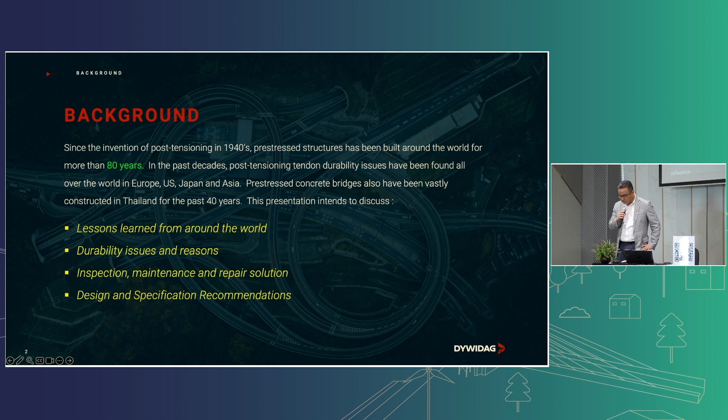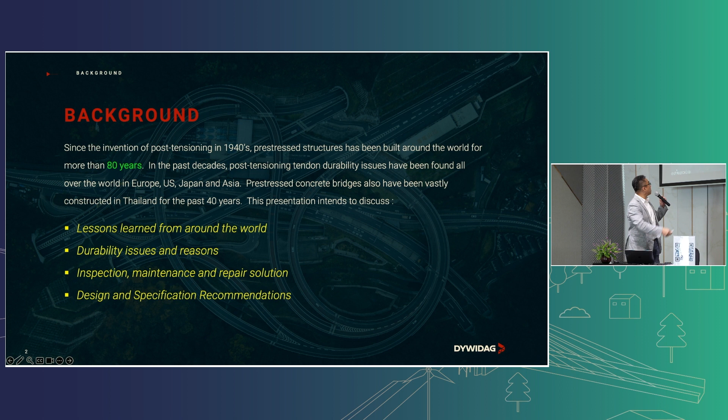Since the invention of post-tensioning in the 1940s, pre-stressing structures have been built all over the world for about 80 years, and that's a lot of structures. But only in the last couple of decades have issues of post-tensioning durability surfaced around the world, in Europe, in the US, in Japan, and so on. In Thailand, pre-stressed concrete bridges have been built over the last 40 years or so. I want to discuss lessons learned from around the world on this issue: what are these issues, what are the reasons, what are the inspection methods, maintenance, and repair solutions that are possible, and finally a little recommendations on design and specification.

When we talk about these issues, I draw a comparison to health inspection. Many of you are probably 40, 50 years old - I'm 52 myself. For many years the doctor has told me, hey, you're at the age you should get a health checkup. But I think a lot of owners have the same mentality as me: first, I don't want to know about it, maybe. Second, I'm healthy, it will not happen to me, right? But as soon as you hear that friends and family around you - the guy running marathons has high cholesterol, a friend of mine, this is real, playing basketball and had a heart attack, your aunt and uncle start to have cancer, problems this and that - you start to tell yourself, hey, maybe I should have a look at myself. So I think this is a common mentality facing a lot of owners, and I started making my health checkups now.

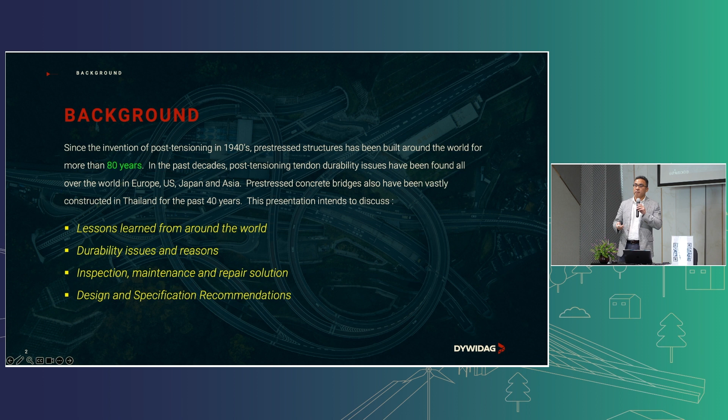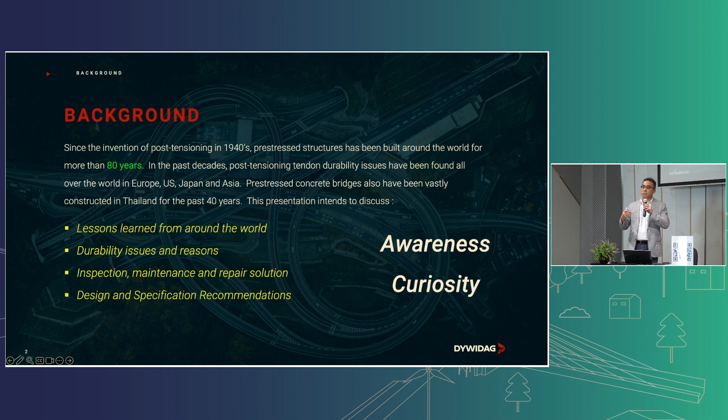So looking at lessons from friends and family around the world, I hope that's the key takeaway for today. It's not for you to rush and start an inspection project, but I want you to be aware of this, and I want you to have the curiosity to look at this issue where it has happened around the world.

A little about myself, besides being 52 years old: I started working for DYWIDAG after I graduated, so I've been around for 27 years. Most of my life I've been associated with pre-stressing structures. I've also built around 20 stay cables and different types of pre-stressing structures. I'm currently the Asian Regional Manager for DYWIDAG, in charge of around 12 countries in the region. It's an honor for me to be here and share this topic with you.

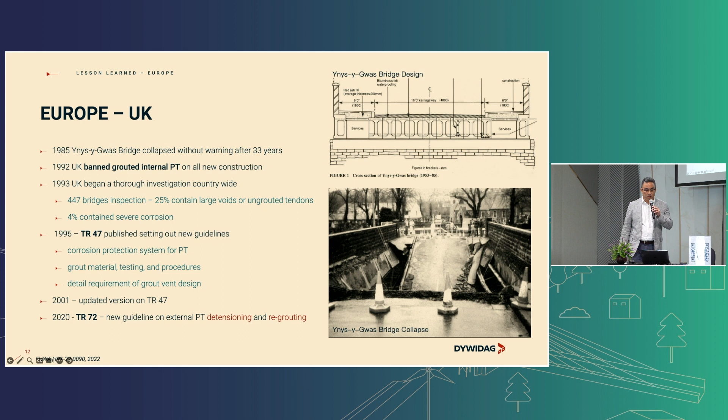In rest of Europe, in Germany, it was found that about 50% of bridges built before 1970 show corrosion damage. With a conservative approach, Germany also banned grouted tendons very quickly, and by 1999 they specified that external tendons have to be replaceable and restressable.

Once you find damaged tendons, if you cannot replace them, there's not much you can do. So from the design perspective, replaceable and restressable became a very important criteria. Nowadays, Germany only uses non-grouted, prefabricated wax-filled external post-tensioning for all bridges.

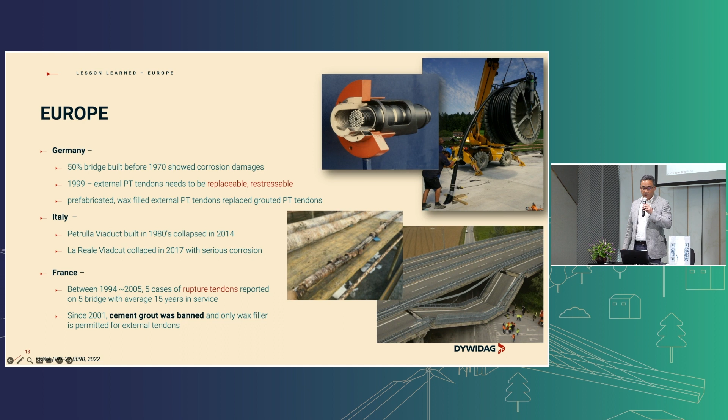France had its own case. Between 1994 and 2005, they found 5 cases of ruptured tendons in 5 bridges, which had only been in service around 15 years. Again, France banned cement grouted tendons since 2001, and only wax fillers are permitted.

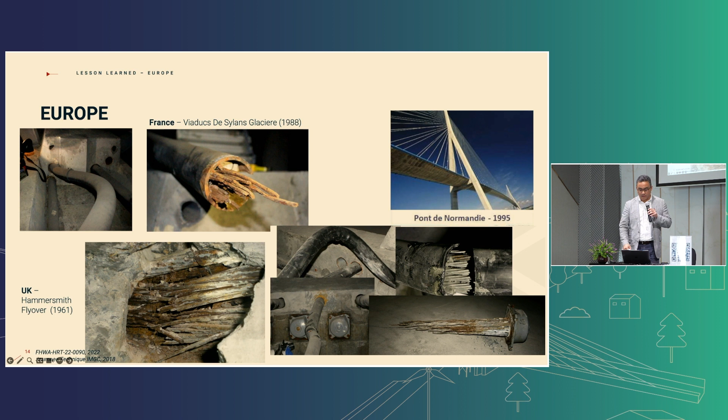This is what ruptured tendons look like. The tendon gets corroded to a certain stage and just snaps open, deformed - this is what happens when you open it up and see these issues. Only owners or inspectors probably will not see this, and it's always a case where you stumble upon it.

So what did Europe do after that? Besides UK, the FIB, the Pre-Stressed Concrete Associations of Europe, took this issue very seriously. A symposium was called in 2001, inviting different countries including UK, France, US, Japan, and so on, to discuss and share lessons learned and problems identified, and they published FIB Bulletin 15 on durability of post-tensioning tendons.

In parallel to UK's TR47, Bulletin 20 was published in 2002, also highlighting the importance of grouting of tendons in pre-stressing structures. A more comprehensive publication was issued in 2005, FIB 33, on durability of post-tensioning systems, again emphasizing design concepts of durability, material and construction related to pre-stressing systems, protective covering, grouting, and the importance of maintenance, assessment, and rehabilitation.

These specification guidelines just continue to improve - it doesn't stop there. Every country, through international committees, continues to look into this issue. Subsequent publications were made in 2014 on polymer duct or plastic duct for post-tensioning.

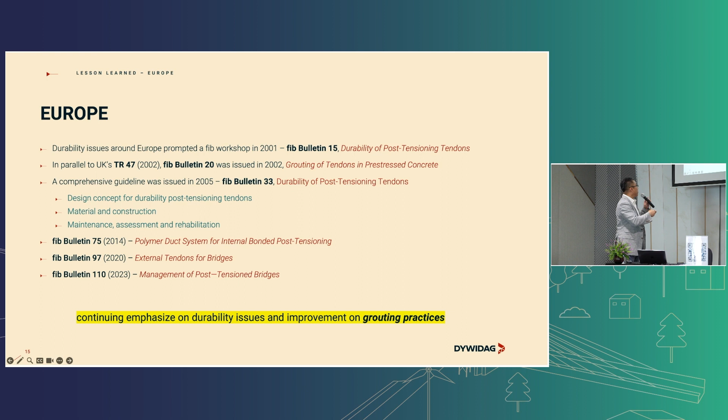There's a comprehensive state-of-the-art technology release in 2020 on external tendons. Then further in 2023, FIB published a very well documented guideline on management of post-tensioning systems, or post-tensioning bridges. Over in the US, a similar thing happened around 1999.

I think this is probably a time where bridge inspection was taken more seriously. So many things happened on different bridges. Niles Bridge, built in 1983, had one ruptured tendon found in 1999. Mid-Bay Bridge was a quite famous case with a lot of publications - one ruptured tendon found in 2000, leading to replacement of 11 external tendons. A more serious problem was found in Sunshine Skyway on vertical tendons of pre-stressing.

So the Florida DOT started comprehensive statewide investigations, which led to a publication in 2002 called New Directions for Florida Post-Tensioned Bridges. It consists of 10 volumes, and there were major changes in terms of concept, practice, design of post-tensioning, detailing, design strategy, grouting material, procedural requirements, and so on - specific requirements such as shop drawings showing correct duct connections, grout ports, vent detailing, and the use of permanent grout caps.

More highlights on grouting material: very strict testing requirements on bleeding, sedimentation, fluidity tests before and during grouting, and also a requirement to do a full-size grout mock-up. You want to do a trial simulating the actual condition of the bridge before you do it - you have to prove to the owner and the supervising consultant that under actual conditions you're able to perform the grouting work properly.

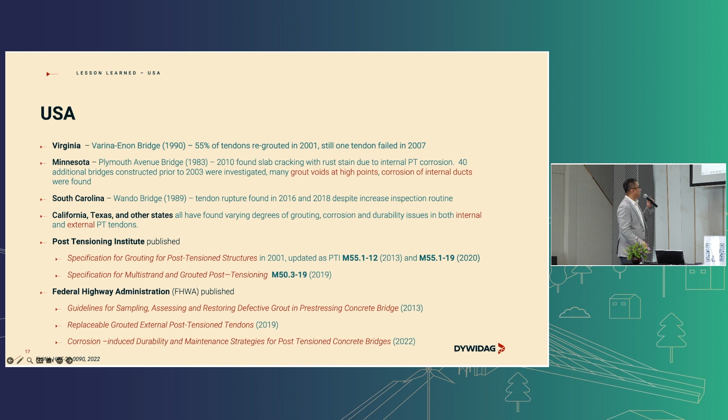The US National Guideline Post-Tensioning Institute published a series of new specifications related to grouting of post-tensioning structures, updated again in 2013 and 2020. Federal Highway also started many investigation reports and research studies, then published a guideline for sampling, assessment, and restoration of defective grouting bridges, and a well documented publication on replaceable grouted external post-tensioning, and further in 2022 another comprehensive publication on durability and maintenance strategies.

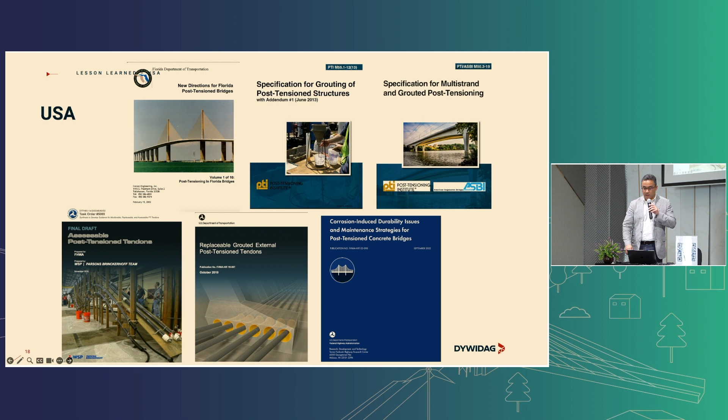So these are all well-published documents, and I think it's good for Asian countries to start looking at this issue more seriously - there's a lot of reference that we can look at and learn from.

Now, closer to Asia, Japan was one of the earliest countries in Asia to identify this problem. An investigation in the late 1990s of about 120 bridges found significant issues - a survey found only about 70 to 80% of bridges had proper grouting. Classification was done on these problem bridges, and you can see corrosion of the cable, failure cable, contributing to insufficient grout or chloride attack was well documented.

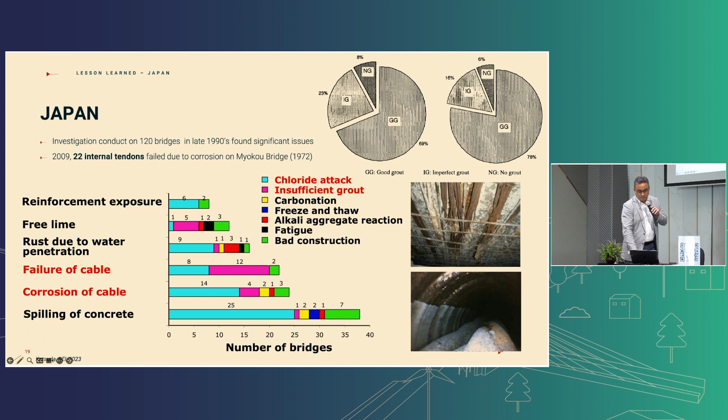Japan, being quite advanced in terms of thinking and improving, took responsibility to look at new construction manuals. The Pre-Stressed Concrete Contractor Association revised their manual 6 times just to improve the guidelines and practices. Also the design and construction guideline published by the Pre-Stressed Concrete Institute was published in 2005 and again in 2012.

The publication mainly focused on non-bleeding flowability of the grout, and also emphasized grout location, permanent caps, replaceability, and inspectability of these external tendons.

They first tried to use transparent duct. It seems like a really good idea because once you have the transparent duct, you see the problems. So they started to use this, and what they found was you get to see the problem and realize you cannot grout these properly. So Japan very quickly did away with this.

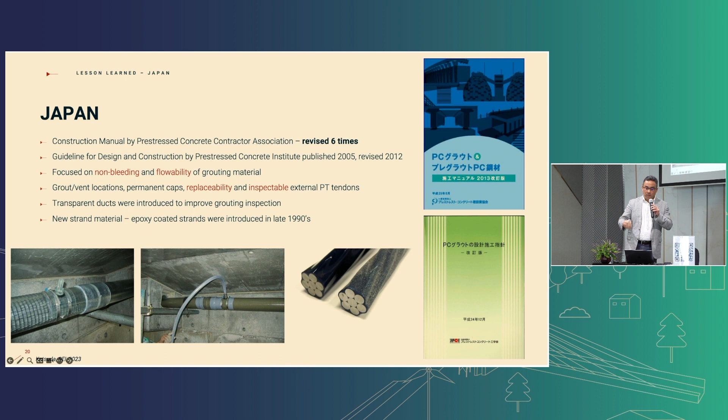So by late 1990, a new material was introduced: epoxy-coated strands. A lot of you have walked into the seminar before - we see some samples in front of you. Instead of rewriting specifications, demanding a very strict testing protocol, or demanding supervisors to really force the contractor or specialist subcontractor to perform the grouting properly, Japan simply got rid of it.

So by 2004, grouting was only permitted on straight tendons for internal tendons, and only epoxy-coated was permitted for external tendons. So you can see by the beginning of 2000, there were substantial structures in Japan using only epoxy-coated strands, and these epoxy-coated strands are not within the HDPE, they're fully exposed.

And these strands have excellent durability performance - you can see after 1,000 hours of salt fog test, it has 0 corrosion. It's been used for a lot of bridges, it's the standard in Japan. I will talk a little bit more about epoxy-coated strands at the end of this presentation.

Let me finish looking at different countries. So Hong Kong - before, it was not an issue. There have been a lot of bridges constructed until 2019.

During a routine inspection, they found a tendon rupture on the Shenzhen Bay Bridge. The bridge only opened to traffic in 2007. There was suspicion of poor grouting practice, and this is what happened when they took it out.

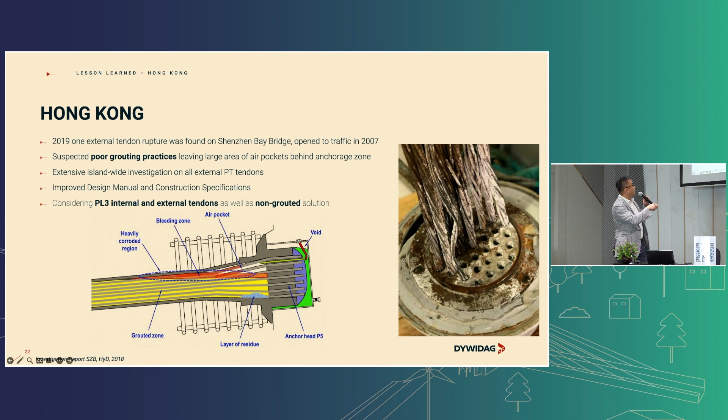There was a large area of air pockets left behind the anchorage zones, and Hong Kong started an island-wide investigation on external tendons. They started to improve grouting practices and design specifications, same as other countries, and now they're considering PL3 internal/external tendons, which I'll address later, as well as a non-grouted solution.

In Korea, same problem was found: ruptured tendons, severe corrosion, and there has been ongoing replacement since 2016.

Not every country is open to sharing their bad experiences. Normally Europe and the US are very open, so you've seen a lot of publications. But because it's not published doesn't mean the problem isn't there. I think a lot of Asian countries, including Taiwan, where I was born and am working, have the same problem—the owner chose not to see this. So maybe it's time for Thailand to start thinking about this.

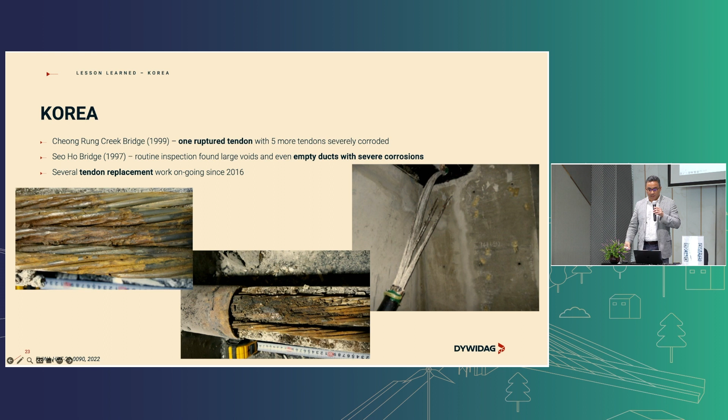So what is the problem with these voids and durability? First, cement grout is the most important protective system in the pre-stressing tendon. With the correct water-cement ratio and appropriate additives, we create an alkaline environment which passivates the steel surface and prevents corrosion from developing.

But what happens, as seen in many incidents in different countries, is very often incomplete filling of tendons. In the ducts, when you don't fill the tendons properly, you leave behind large void areas, exposing them to oxygen and moisture, leading to corrosion of tendons and in some cases severe failure.

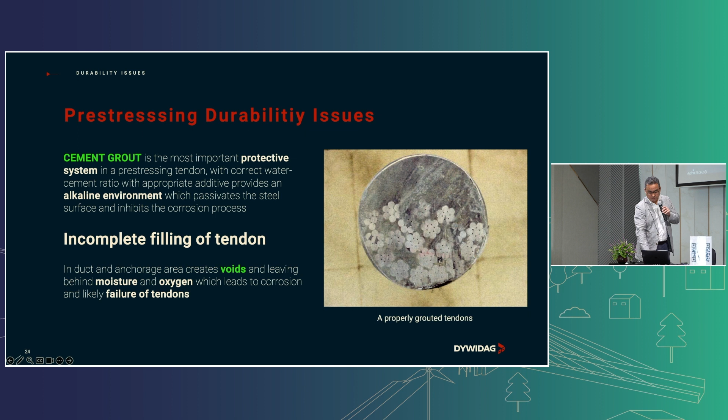Before looking more at durability, let's look at what's in the cement grout mixture. It's actually quite simple: just cement, water, and admixture.

But if you look at the correct specifications, first the cement should be only Portland Type 1. Very importantly, you need to check the content to ensure minimum or even zero chloride and sulfate, which Professor Chokchai already stated is a very important element affecting durability of the concrete.

With a Blaine value of 300 square meters per kg—Blaine value relates to surface area—you need fine grains of cement so that when you mix the grout it creates minimum lumps and better flowability.

The water used should be drinking water—the same nice water we use for beer and coffee should also be used for cement grout. No organic materials are allowed, and you should have a minimum content of poor materials that could affect the mixture.

We use different kinds of commercial admixtures available to buy, normally for improved water reduction, flowability, setting time, bleed control, and volume control—but very importantly, no expansion agent is allowed. Besides mixing, there should be requirements for laboratory and field testing with mock-up trials to reflect actual bridge conditions.

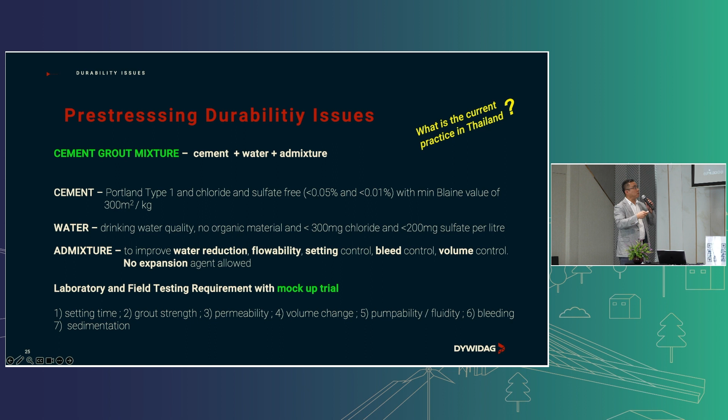But the question is, what is the current practice in Thailand? I don't know—maybe you can tell me. I come to Thailand a lot, but I cannot read Thai specifications. We all know it's cement plus water plus admixture, but are these specific requirements being followed in Thailand?

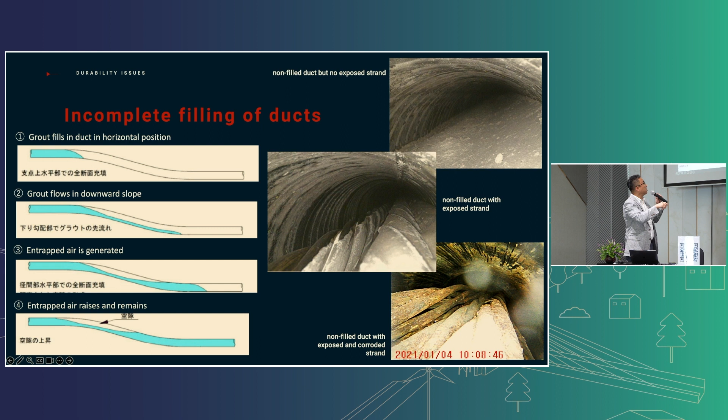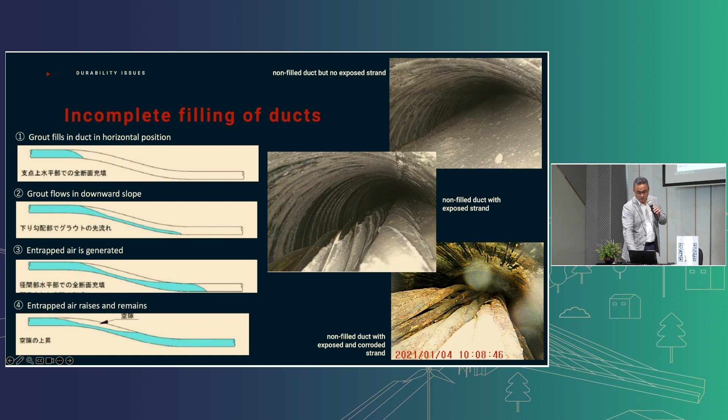If you look with a borescope, if lucky, you might find grout fill covering the strand without it being exposed. If you're not lucky, the strand is exposed without grout covering it. And if you're really unlucky, you'll find strands in very corroded condition. This is related to how you do grouting.

It's not just about mixing and pumping. As I said in the previous specification, a lot of emphasis is placed on design and placing of grout inlets, grout outlets, and the sequence of how you grout.

Once the grout is pumped and comes out of the mid inlet outlet, you should observe the outlets to make sure there is sufficient quality of grout coming out. Then you shut it off and continue to pump until the next high point, observe sufficient grout quality coming out, and shut it off.

You're supposed to keep the pressure for a while to make sure the grout continues to pump until it's really full, then stop for a while. And this is something I'm sure nobody does: you're supposed to go back and open all these vents to check again after setting, for reasons I'll discuss later—bleeding, segregation, leaving voids. So you're supposed to recheck this, and if necessary, refill it.

The takeaway today is you have to be aware that these issues could cause corrosion and impact the design life of the bridge. So the grouting procedure itself is already very important.

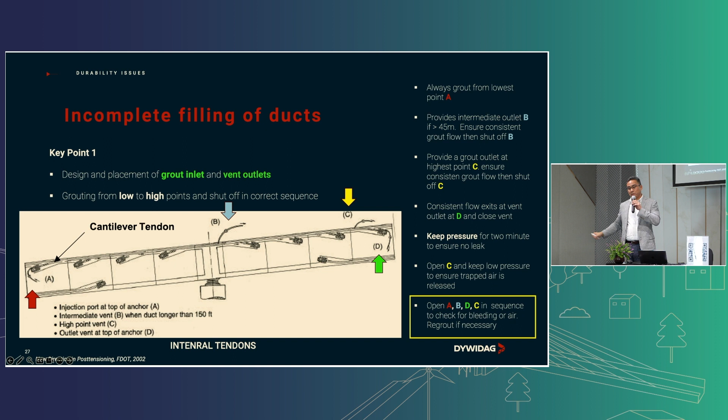Unfortunately, a lot of the time we're under pressure from the general contractor or the owner: finish this in 5 days, finish in 6 days, and we just run and run. We understand every owner in the world is like this, but in reality, this is also the cause of all these problems we've found globally. So the grouting procedure is very important.

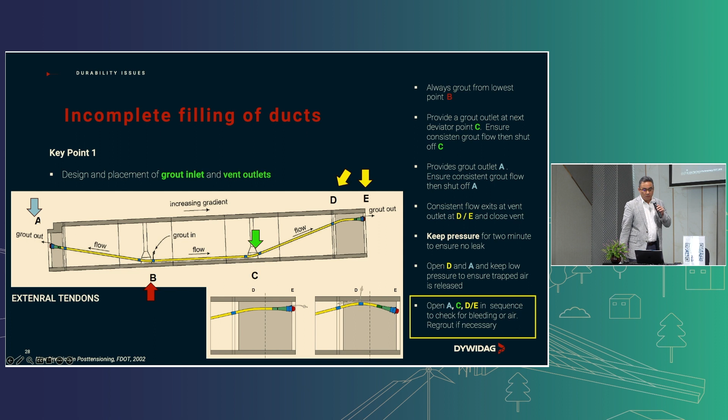For an external tendon, it's the same. You should grout from the low point going up, checking different points at different heights to make sure the grout is coming out properly. Then you seal the system, keep the pressure for a while, recheck, and regrout if necessary. This is just an illustration of how things should be done properly.

Now, what happens if it's not done properly? I had a fortunate, or unfortunate, case. In 2019 in Taiwan, we had the collapse of an arch bridge.

It's called the Nanfang Ao Bridge. I'm not sure whether there was news of it in Thailand, but it was a failure of a stay cable. The whole arch bridge came down and 6 people were killed.

Obviously that started a whole awareness for the owner. From our perspective, this is the last cause we want to see—for the owner to start being aware of this due to loss of life.

But the focus was not on the main bridge. Actually, during the demolition of the approach bridge, I went to see how they were taking down the segments, because it gave a very rare chance to see a post-tensioning system after 23 years.

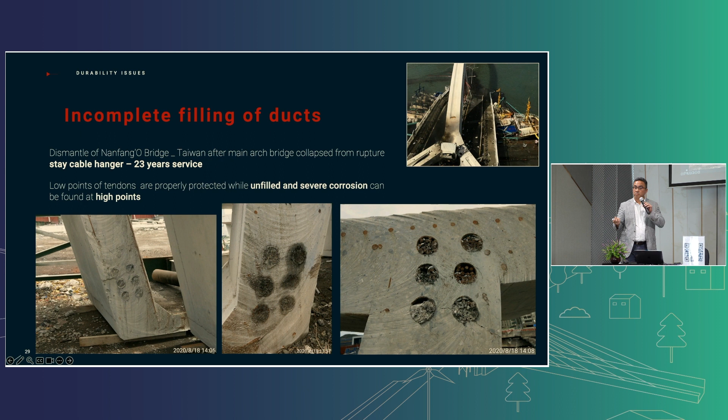You can see the lower part of the tendons are actually in quite good condition. But when you look at the high end of the web, you see voids and corrosion. If you look closely, they're so corroded that you can just pull them out, and some of the strands are dust—not even strands anymore.

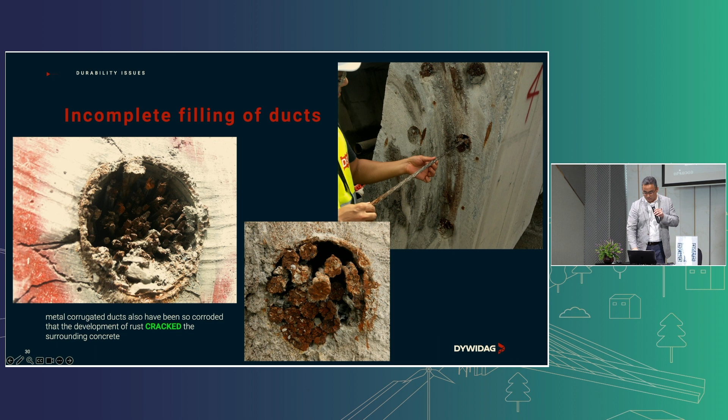What's really interesting is looking at the corrosion—not only the strands, but the metal duct around them. It's so corroded that it's causing cracks in the concrete. So cracks in concrete don't only come from external impact, they can also be caused internally. This gives some understanding of what happens when you don't grout properly.

So why do these things happen? I want to explain the concept of segregation and bleeding. According to fib 20, the bleeding requirement of water and air after 3 hours at rest has to be less than 0.3%.

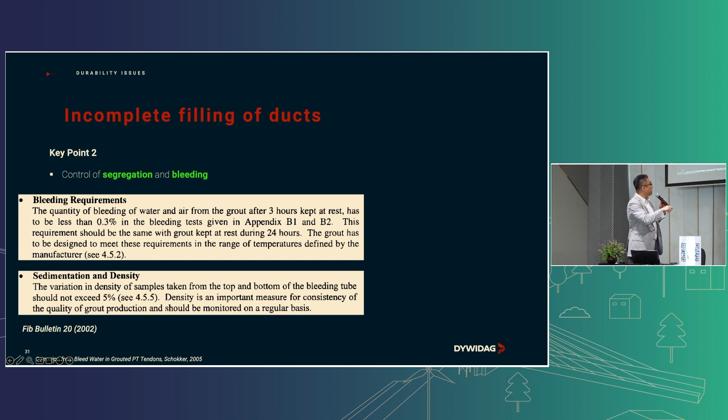When it comes to sedimentation, after bleeding occurs, the density difference between the top portion and bottom portion of the grout should not exceed 5%. But in reality, this is very difficult to achieve.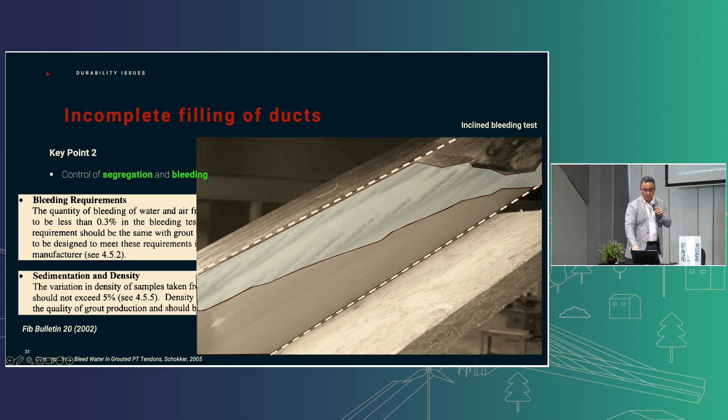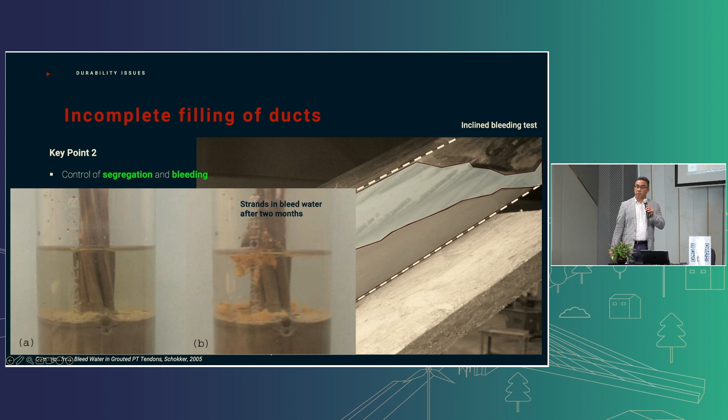From research, you can see that once this happens, the strand actually starts to corrode in 2 months. So in a lot of cases, the owner has taken over a bridge where the pre-stressing tendons have already corroded for several, maybe 1 or 2 years. So it is a serious issue.

So what does it mean, how does this come from? If the grout mix design is incorrect, once you start grouting in the duct, the fresh grout with light and heavy matters start to separate. Slowly you get water surfacing on top, and then you have a sort of medium transition of chalky grout.

Too high a water content, not a very solid grout, and in the end you'll have a void on top. First you have water, which then translates to immediate corrosion of the strands. Then you have a void with some poor grout, and this is what happens. So this highlights the concept of segregation and bleeding.

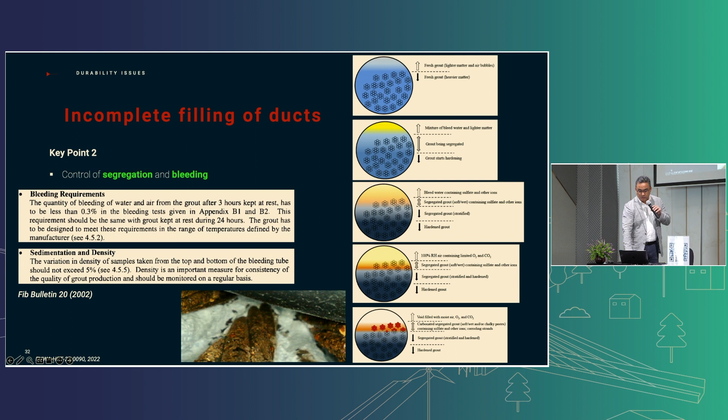And what does this 0.3% mean? Is it enough? It's actually a very difficult target to achieve. But I'll give you an illustration.

This is a very typical tendon, 2 spans, precast segmental, each span 37.5 meters, so total this continuous tendon is 75 meters. 19 strands, we use inner diameter 100 millimeter duct. So this is the theoretical duct volume minus the strand volume, and you get how much grout we should use to fill it.

But then you take the allowable 0.3% of that, you come out with about 1.16 liters of water allowable by the specifications. And how much is that water?

If you look at a typical anchorage system, if the bleeding is dispersed along the duct, then we have a small area, that's fine. But it gets concentrated once you grout in one direction, and in the end the bleeding all comes into a location in the anchorage zone, then this is the volume you'll see.

Very often you will see the same case as before, it gets exposed like this. And if you take that 1 liter, look at 1 meter long of a 100 millimeter duct, this is approximately the area, so it's quite difficult to fill this.

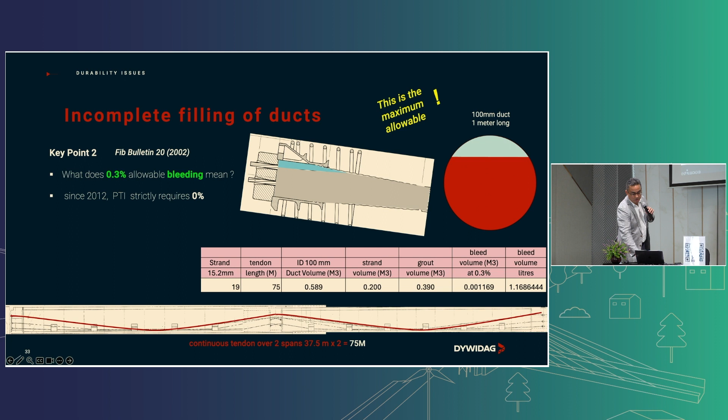So what does 0 mean? 0 means like this. In the wick-induced bleeding test, this is what you need to have. You're not allowed to have any volume changes. However much grout you pump in, it should stay like this. It should have no water coming out.

So in summary, incomplete filling of the duct can be caused by air traps and improper grout mix. A lack of quality control can lead to excessive segregation and bleeding. Water and voids lead to a breach of the protective system, creating a corrosive environment for highly sensitive pre-stressing strands. Durability issues are often undetected during the structure's service life until something bad happens.

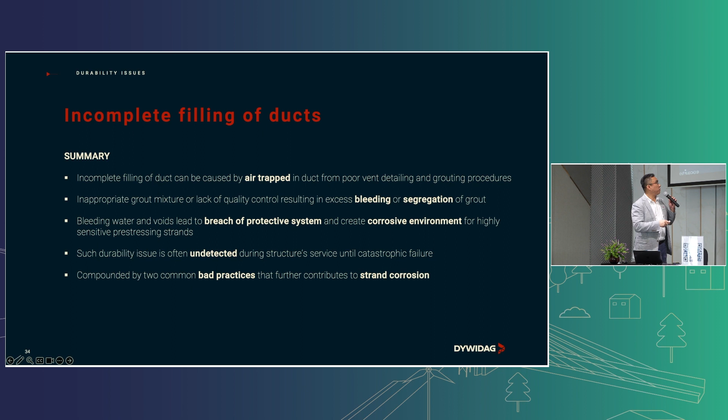Additionally, I want to share 2 practices which I have observed in Thailand, which further compound the problem of strand corrosion.

The first is flushing water. As I understand, this is quite common in Asia. Before you grout, you want to clean the duct by flushing water, to wash away the rust band on the strands or any dirt inside the duct. This practice has been stopped by FIB since 2002. You're supposed to clean the strand before you insert it, not clean it after you insert it.

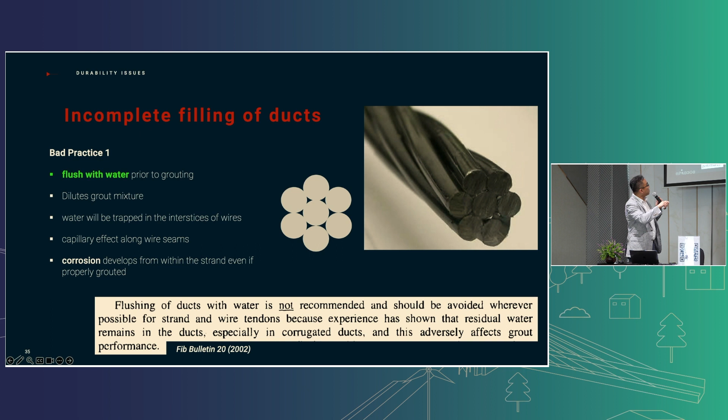So what happens when you flush the water? You blow it out at the end, but how many of us are really confident that we actually blow all the water out? In fact you have water remaining, which dilutes the grout mixture, and it's already very difficult to meet the 0.3% bleeding requirement, but you're adding more water into it. So that compounds the problem even more. Additionally, water will be trapped inside the interstices of the wires due to a capillary effect.

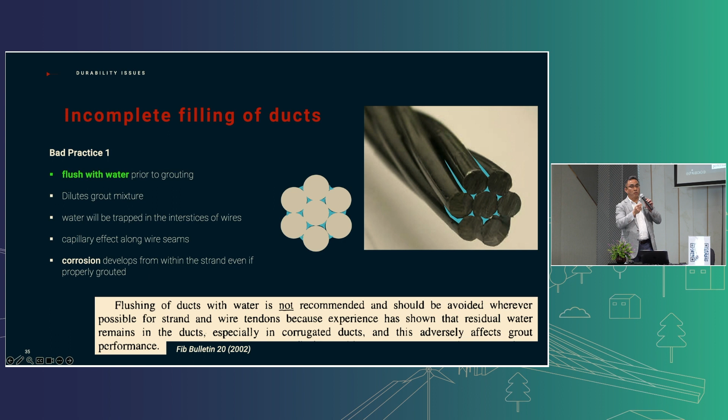So what happens is, once you flush the duct and blow it away, this is what happens: you have water remaining. Then you grout it, and the strands start to corrode from inside. This is a very important concept to remember.

So flushing with water is highly not recommended. Second, not using temporary grout or permanent grout caps. When you do grouting, you're supposed to let it flow into the anchorage area, and using a grout cap, let the grout flow through the wedges, filling up the caps. Whether it's permanent or temporary for internal PT, this is what you should do.

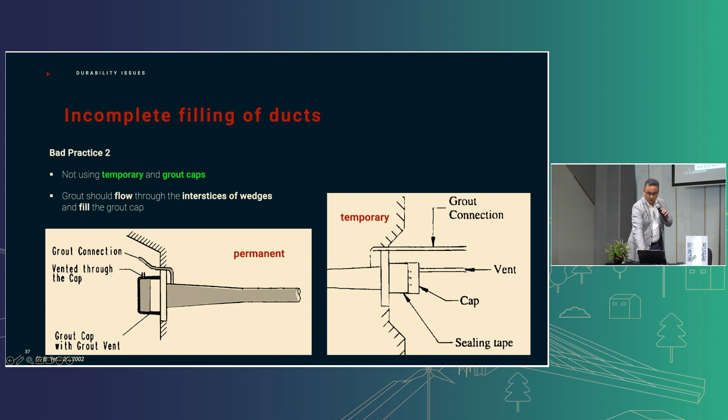But what do you normally do? You just hand mix a batch of concrete and slap it over, seal it up. This is a very common mistake, hand patching with cement mortar. This actually prevents the grout from flowing through the interstices of the wedges and keeps water moisture in the anchorage.

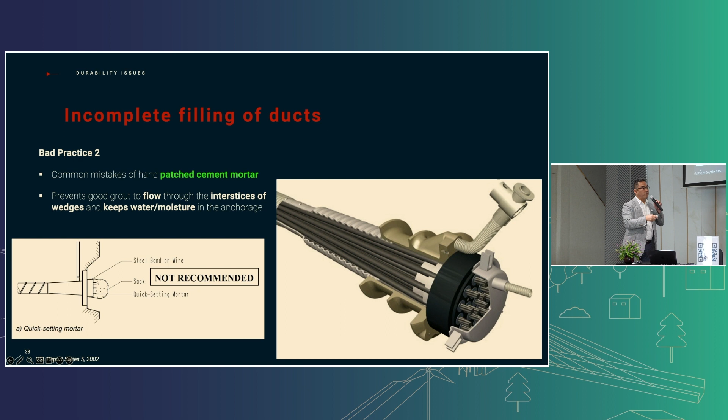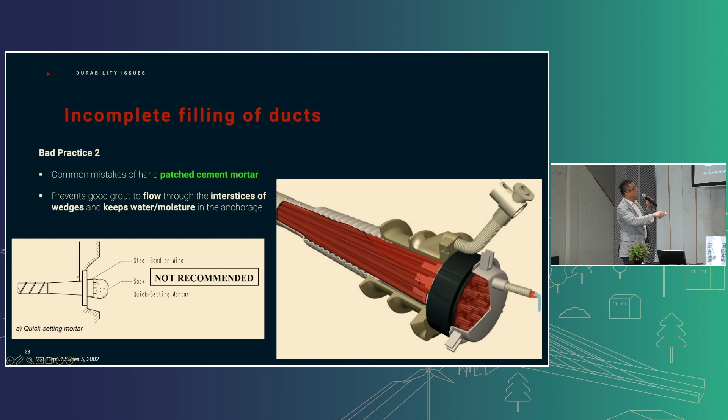Here's an illustration as you grout through. If you have a proper grout cap, you're supposed to push this water through these wedges. Then the grout fills the cap and you push it out. Now, if you stop it there, the grout just comes over and the water stays here. This is what you find when you open the cap or the mortar. These small practices make the corrosion issue even worse.

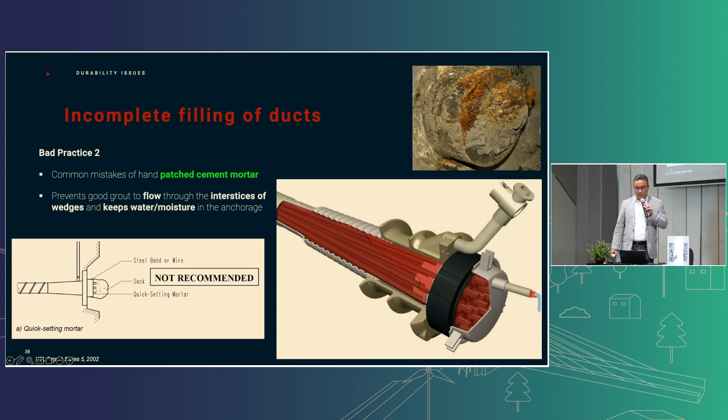So what does this do on a structure? In reality, catastrophic failure is rare. You don't really hear it, maybe people don't report it. We've seen it on documents, but it's a rare case because it's quite difficult to collapse a pre-stressed concrete bridge. First, probably about one-third of the strands need to be ruptured or have wire breaks before the tendon itself fails. So let's say you need to lose about 6 strands within 19.

Additionally, typically your span-by-span precast segment will have 6 or 8 tendons. You'll need about 25%, or 2 tendons, to fail before the bridge starts to be in danger. But it could happen if you don't deal with it in 30, 40 years. The loss of PT serviceability will lead to structural cracks and deformations, which you may find on a bridge inspection, but you probably don't associate it with PT. You probably think it's a concrete problem, or as the morning professor said, contamination, but it could be coming from the PT.

So it's something that you don't really realize. Basically, it accelerates the deterioration and reduces the life of the bridge. So it is an issue.

So what should the owners or a consultant do, facing this potential durability problem? First, ask yourself: are you doing proper bridge inspection or maintenance? If so, is the relevant post-tension inspection included in your program? Maybe you don't know this should be done, or don't know what to do. This is why you should look into the literature I referred to, whether it's FIB or FDOT, and start to build inspection items into your normal maintenance program.

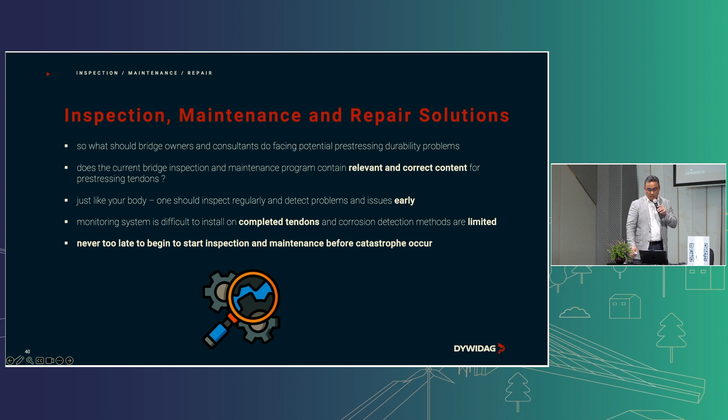Just like your body, as I said earlier, you should do regular inspections, or a health checkup, to identify the issue earlier. Sooner or later you have to face it. A few years ago I was hesitant to do so, but once you start to learn more about the problems around you, you start to realize you should do it. It's never too late to start inspection or maintenance before catastrophic things happen.

So what can you do? Let's look at inspection. Unfortunately, internal tendons are very difficult to inspect. It's embedded in concrete, you cannot really see it. So there's really no proven economical inspection method.

There is some technology in the process. But before talking about inspection, I want to emphasize that's why correct grouting, mixture, and placement is important, because it's very difficult to inspect. Better to do it right from the beginning.

So there are some ground penetration radar with enhanced imaging that allows you to identify the tendons or even void conditions. There's also a different technology related to impact echo, also with enhanced imaging, that can do this.

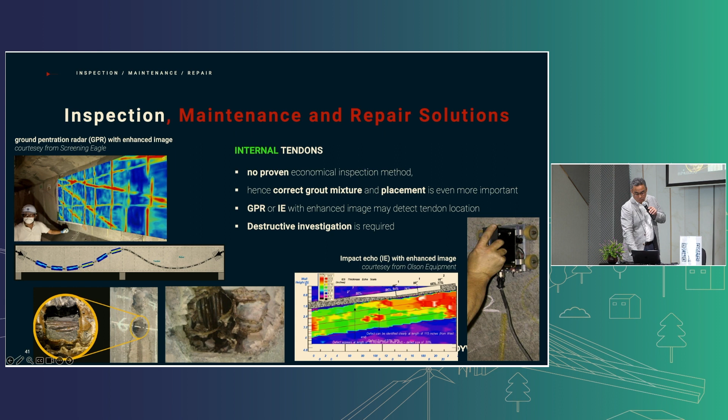But once you identify this, you have no other choice but to break it up, right? So destructive investigation for internal tendons is always required. For external tendons, it's a little easier because you can do some routine inspection by tapping,

or you can just kick it like this. I won't play the sound, but you can hear a very distinct difference in terms of grout filling or empty duct. Once you identify it, you drill a little hole and put a borescope inside. But in general, a tapping method and visual inspection is enough for you to identify something very early.

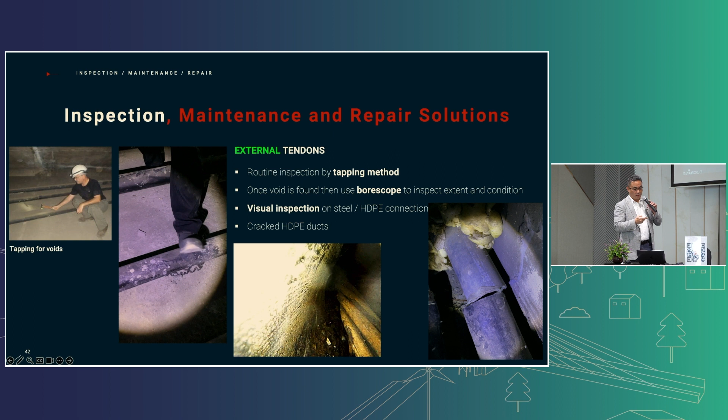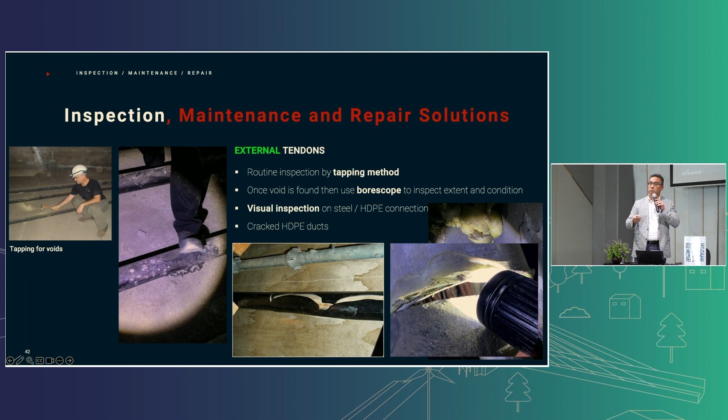So besides hollowness or sound, you want to look at the connections of the HDPE and the steel duct. You want to look at the HDPE itself, whether there's cracks. These are very simple things to do, and the owner just has to make sure that the normal maintenance contractor or inspector is doing it and recording it properly.

There's additional technology we are developing at the moment. For example, robotic magnetic induction, which we've used extensively for stay cables, which Jacob will share a little later. You can also use it to check for severe corrosion or wire breaks existing in the tendons, or there's another technology called capacitance tomography to map the voids inside. So these all just help you identify problems.

There's also some technology, mostly in the research stage, called guided wave ultrasonic, which allows some penetration through a grouted section, but normally it's in the range of 30 to 50 centimeters. But it gives you a quick look at what's behind the anchorage itself. So there are methods that you can use.

So what happens after you do the inspection and find problems? As I said, unfortunately for internal tendons there's not much you can do. You have to do destructive testing, drill the holes, expose the defect, and look at whether there are voids or even corroded strands.

You should clean it properly, and then do vacuum grouting assisted regrouting. These are some of the pictures we've done in the US on several projects. The idea of regrouting is just to reinstate the alkaline environment to make sure further deterioration doesn't happen.

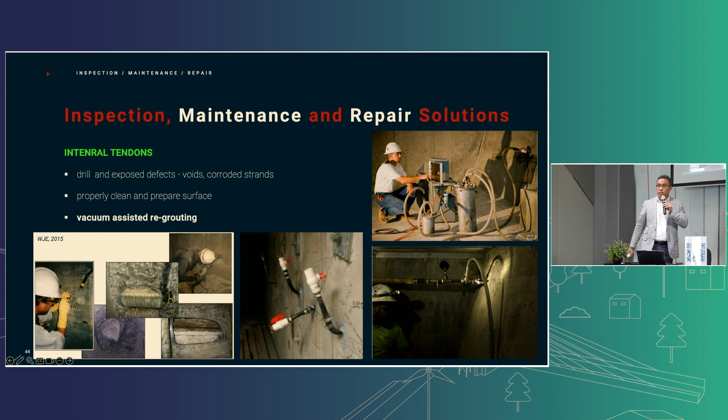So another thing is on the pour backs or the cement patches. What the US is doing now is removing these, because I've already shown you what could happen if you don't do it properly.

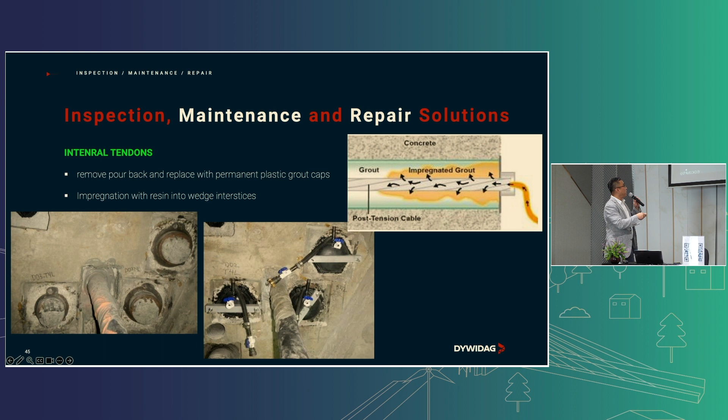You remove it. Some clients or owners use a special resin they call impregnation, to pump into the wedge area for corrosion inhibition, and then replace it with permanent grout. This is the proper way to protect your anchorages.

Now for external tendons, if you find a crack or damaged HDPE but the grout is still sufficient, then you just repair the HDPE. There are handheld devices we can use to repair this. Please don't use duct tape - this is really bad and it doesn't give you a proper watertight seal.

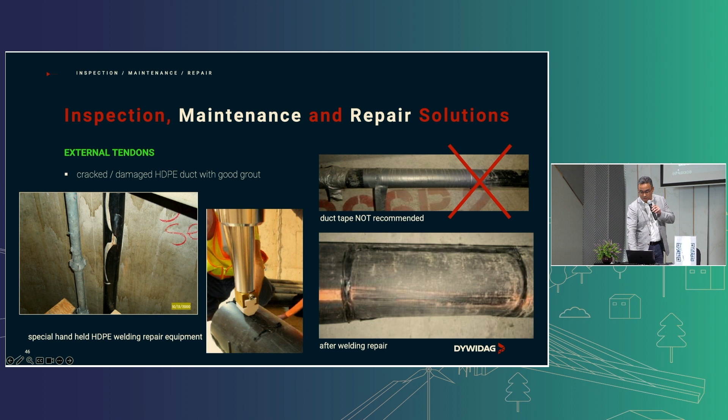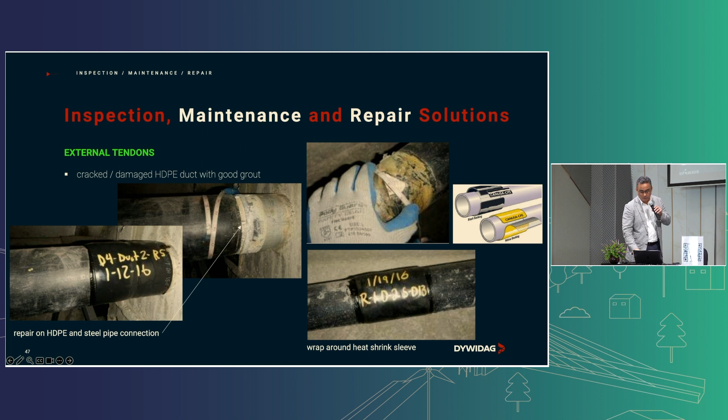And if you have a connection like this where you see separation, you do a nice heat shrink sleeve, which allows you to fix it properly. So these are very easy things to do, just to patch things up if you can find it, if you spend the time to find it and address it.

Now, if you identify voids in the HDPE duct, you open it and see this, then there is some problem. Obviously, you need to engage material experts to decide the extent of the corrosion and whether it's acceptable or not.

If it's deemed acceptable, then you have to clean it properly and regrout it with a connection like this - half-shell HDPE, vacuum assisted grouting, heat shrink sleeve - to put it back as close to its original condition as possible. Now if it's already corroded with wire breaks, then you have no choice but to replace it.

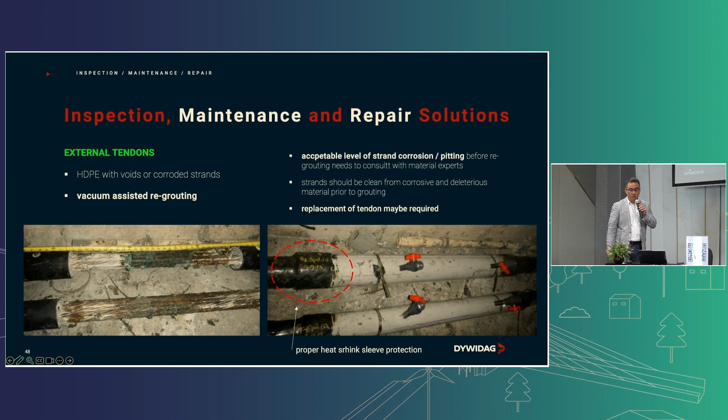So let's talk about replacement of tendons, if it's replaceable. The first thing you might have to ask - currently in Thailand, are your external tendons designed to be replaceable?

If it's replaceable - let's say DYWIDAG or even our competitor VSL Freyssinet - they all have quite good technology on how to de-stress these. Obviously it's very dangerous to de-stress this because there are such large forces, so it has to be performed by specialists in a very controlled and safe manner. You always need to engage specialists for this.

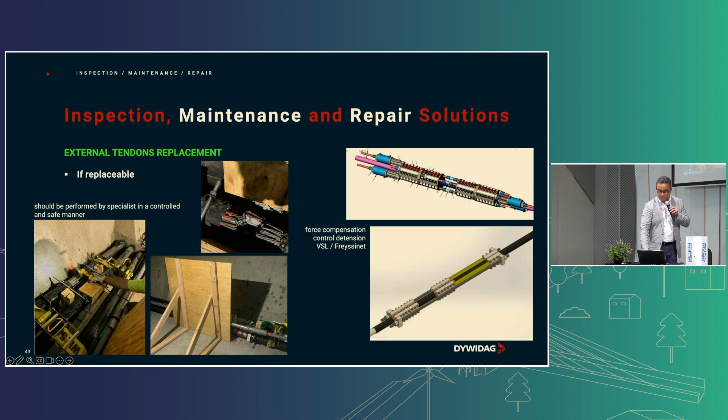If it's not replaceable, then you have no choice - you still have to cut it, because someday it will rupture, and then you have to install new external pre-stressing. Obviously installing new external pre-stressing tendons is very costly. It's much better if you already design the external tendon to be replaceable.

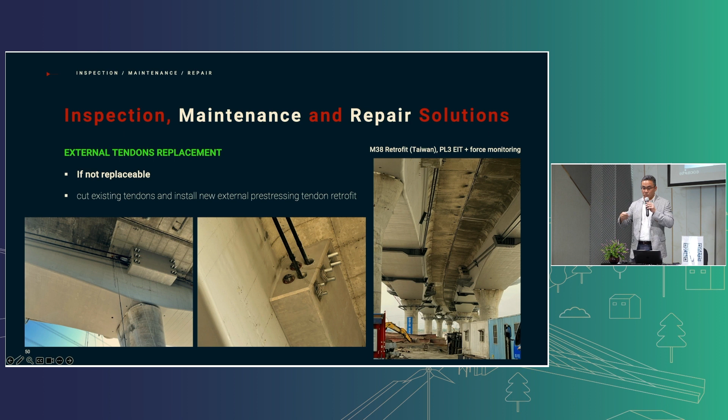So this is why I want to look at some design and specification recommendations that you can do in Thailand. First of all, as I emphasized several times already, improve grouting material, improve testing, improve your vent detail designs according to correct specifications, whether it's FIB, PTI, or British Code 445, 446, 447. Please incorporate inspection of prestressing tendons as part of your normal maintenance program.

Adopt PL1, PL2, PL3 prestressing tendons, which I will explain in the next slides. Try to design replaceable tendons. Otherwise, if you have problems and want to install a new external tendon, it becomes very costly and very difficult. Alternatively, you can look at what Japan is doing, using a non-grouted solution such as epoxy-coated strands. There is a lot of literature you can refer to, and I really encourage owners and consultants to look at these very carefully.

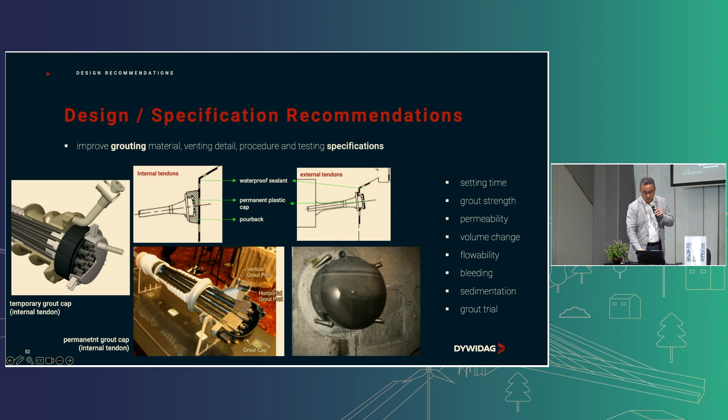So first, improve grouting. I mentioned this, I'll just reiterate again: proper temporary caps, proper permanent caps, and a set of tests that you should do before grouting, during grouting, and even after grouting, such as rechecking. Write that into your specifications as a consultant or supervisor to enforce it.

Inspections. This is a very good reference to look at, FIB 110, published last year, on management of post-tensioned bridges. If you're a bridge owner, you should know this. It's very common to have a routine inspection, detailed inspection, and special inspection, so you should incorporate the prestressing part into this. For example, in routine inspection, just ask your supervisor or consultant to do a walk-through visual inspection, looking for cracks, spalls, and corrosion stains, which are signs of prestressing problems, among others.

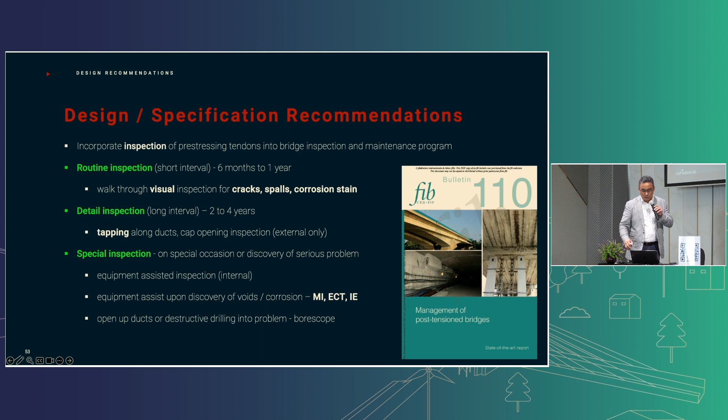You can do tapping along external tendons, which is very easy to do. If you find a problem, you can select some to open the cap, but you can only do this on external tendons if you have a cap. Now, if you find voids, you have to put this under special inspection. Then you need to use equipment-assisted inspections, such as ground penetrating radar, or for external tendons, magnetic induction, capacitance tests, impact echo, and so on. Then some destructive drilling is necessary. So you should regularly put this into your maintenance program and carry it out.

So from a designer's point of view, you should address these issues correctly — for example, correct waterproof membranes, correct drainage details, things you need to consider to make sure that if something happens, external elements do not come into the prestressing system.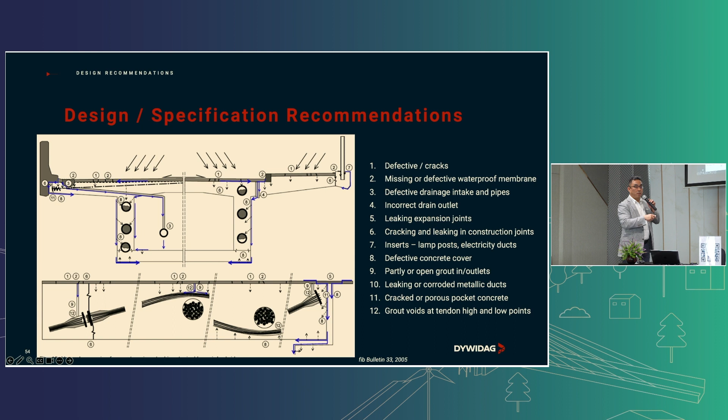So what is PL1, PL2, PL3? This is basically protection level 1, 2, and 3. I think in Thailand you only have one type of tendon, PL1. But you're supposed to select the type of tendon according to different environmental exposure and different structural protection layers that you have.

So what is PL1? PL1 is a very standard duct filling material, consisting of, for example, a corrugated metal duct with proper grout according to the spec I mentioned already. PL2 is PL1 material but in a complete enclosure, meaning full encapsulation — you want a watertight, impermeable envelope over the entire tendon to offer durability protection. You should test these for leakage using air pressure, not a water test, in accordance with relevant specifications, and you should always think about replaceable design.

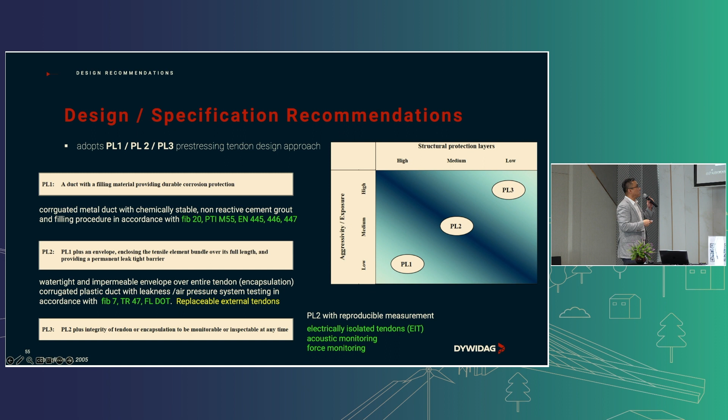Now, some clients want to monitor their prestressing tendons. This comes with PL3, which is a PL2 encapsulated system with reproducible measurements, meaning continuous monitoring. You can do this in several ways. The most common is an electrically isolated tendon, or EIT, which allows you to monitor the current produced when corrosion occurs — a very good indicator. Or you can do acoustic monitoring to check for wire breaks, or force monitoring to look at the development of prestressing forces. So this is what a replaceable and PL3 monitorable system looks like.

It's different from the normal prestressing tendon you've probably seen in Thailand — it has two trumpets. So out of the embedded casting, you have an outer trumpet that connects to the bearing pipes or the deviator.

Then you have an inner trumpet that runs inside and connects with the HDPE pipe. The blue part with the anchorage gives you full encapsulation, and either you have an electrical isolation plate, which creates the EIT system, or you can have a monitoring system like what we offer, Dynaforce, inside to give you monitoring capability.

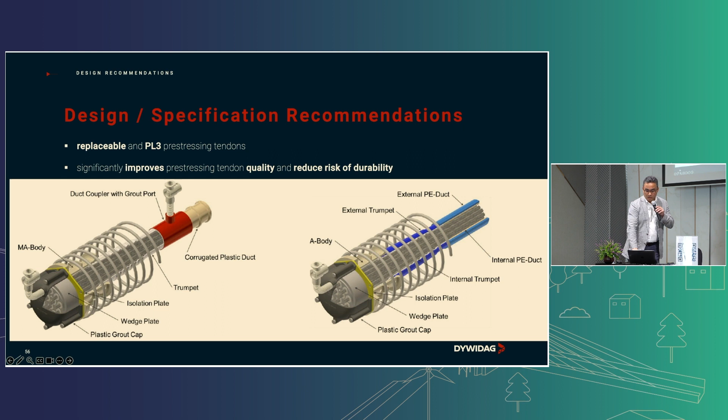This is an illustration of the replaceable PL3 system, which significantly improves durability, improves quality, and reduces risk. Here's a closer look at the internal PL3 system and an external PL3 system. I'm running out of time, so I'll go quickly now.

Another option we want to highlight is the use of a non-grouted system. Tremendous effort over the last two decades has been spent improving grouting methods and technology, but you can also choose what Japan did - forget grouting completely.

This is an example of a non-grouted solution using epoxy-coated strands. As I mentioned earlier, it has been used in Japan since the early 2000s, in over 1,000 structures. It's fully replaceable, fully inspectable, and completely eliminates grouting durability problems. It's currently under consideration by the Federal Highway Administration in the US.

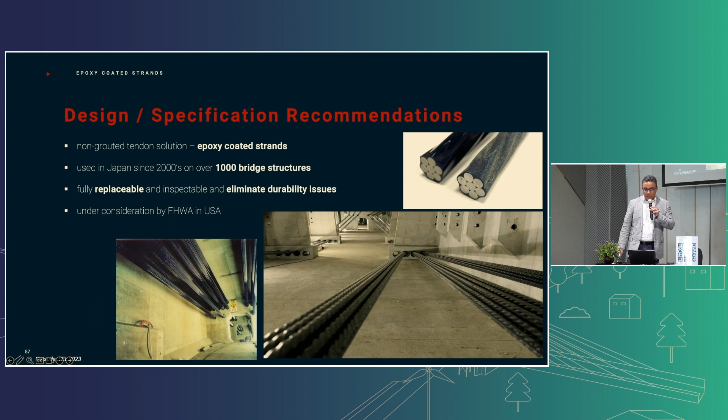When you think about epoxy-coated strand, don't relate that to epoxy-coated rebar - there are two completely different types of epoxy technology. This is a special resin type with a coating thickness of about 0.6 millimeters.

It's produced through a very careful production method that gives you a holiday-free coating, so there are no pinholes in the epoxy coating. The interstices between the wires are completely filled. It provides excellent corrosion protection, and it must subject to very high bending requirements. So when you break a strand, the resin actually elongates and breaks together with the strand.

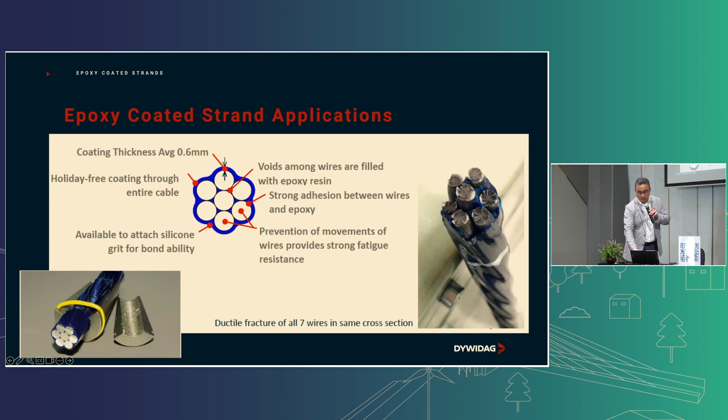It's already a very well recognized material, published in specifications according to ASTM, ISO, Japan, and even China is using this very often now. It's part of the recommendations of PTI and FIB for stay cables.

The very first extradosed bridge in the world using epoxy coated strand was the Odawara Bridge in 1994, and the first non-grouted external post-tensioning system using epoxy coated strand was in 1994 on the Shutoko Metropolitan Expressway. We're seeing more and more of this now, especially in marine structures - viaducts near marine or highly corrosive environments.

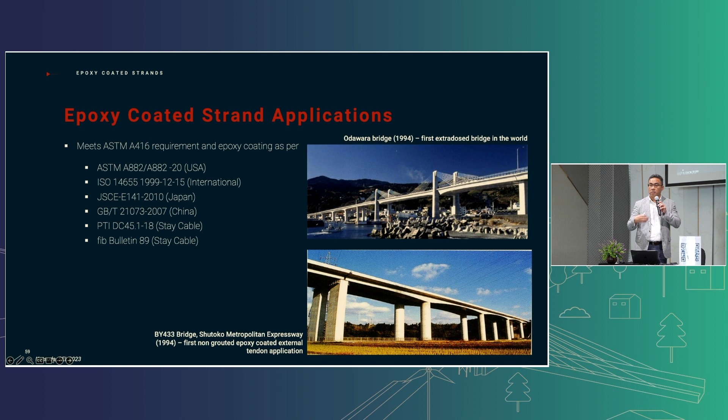I'll give you a recent example in India, the Mumbai Trans Harbor Link - a bridge of close to 20 kilometers - they also decided to use fully epoxy coated strand. So it's something worthwhile to think about when you come across highly corrosive environments where you want something to last forever.

It has been widely used. DSI used it for the first time in 1987 on the Quincy Bridge, a stay cable bridge in the US. In 1989, a very well-designed, famous bridge called the Alamillo Bridge in Spain.

We actually did the inspection a few years ago on this project, and it looks perfect - it still looks perfect. There are several references in the US, also in Vietnam and Sri Lanka.

Currently we're building two very large stay cable bridges in the US - one is the Corpus Christi Bridge with 3,200 tons of stay cable using epoxy coated strands, as well as the Houston Ship Channel using 2,700 tons of epoxy coated strand.

So, in summary - prestressing durability. I hope I've spent the last 45 minutes emphasizing the lessons learned, and I hope that awareness will start to come in Thailand.

If not already addressing this issue, you should improve grouting method specifications in line with international guidelines. You should incorporate appropriate tendon inspections into your normal inspection programs. Once you identify a problem, you should repair and improve these tendons to ensure the structure's design service life.

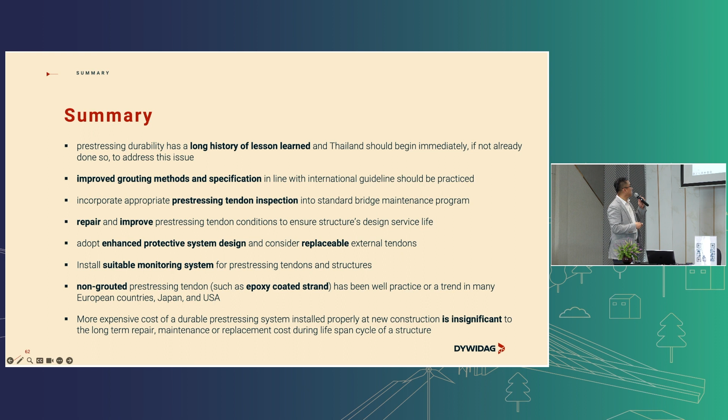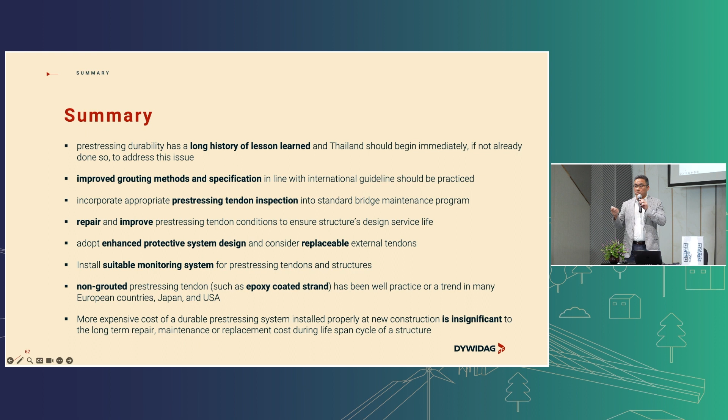One last thing to keep in mind - changing to a new system, adopting PL3 or epoxy coated, becomes more expensive. But even with the expensive cost of a durable prestressing tendon installed properly, it's still cheaper than what the rest of the world has been doing in terms of replacing, maintaining, and regrouting.

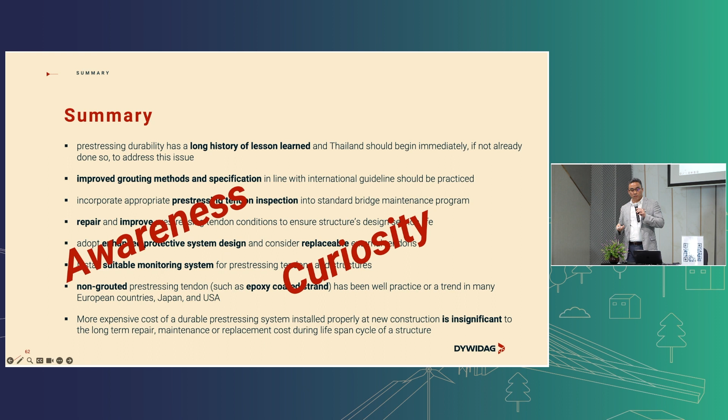So again, the takeaway - I want you to be aware of this issue. I hope you continue to be curious about these issues. And I hope that sooner or later, like me, you go to the doctor and make your appointment quickly. All right, thank you very much.